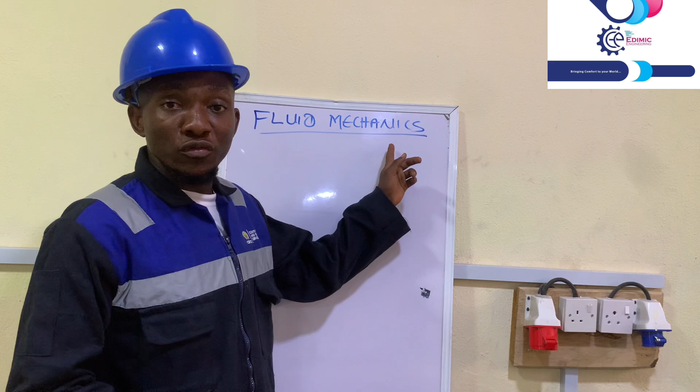So on today's class, we'll be talking about fluid mechanics. This happens to be a very important aspect of mechanical engineering. Fluid mechanics is very important, and if you must be a successful mechanical engineer, you must consider fluid mechanics. So on today's class, we'll be talking and teaching about fluid mechanics.

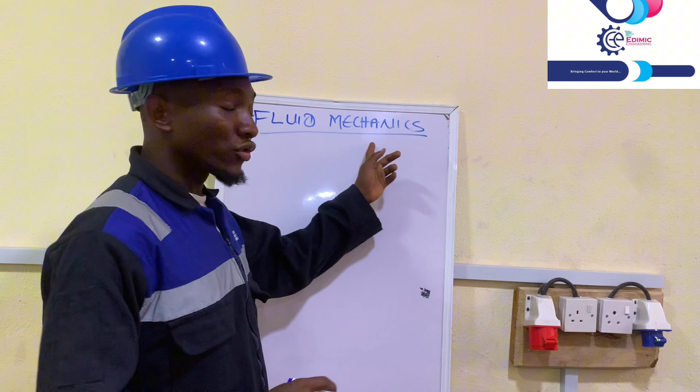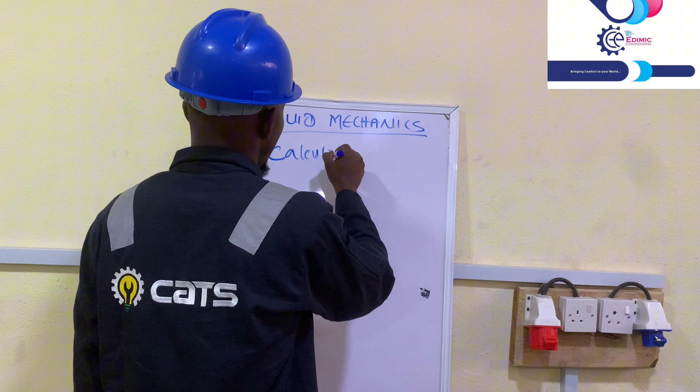But before we go into it deeply, I want to tell you the prerequisites, what is very important if you must scale through this very topic and course. There are things you must pay attention to, number one is calculus, which has to do with integrations and derivatives. So if you must be a successful fluid mechanics engineer, you must know your calculus very well. That is a prerequisite, something very important if you must deliver this course, fluid mechanics.

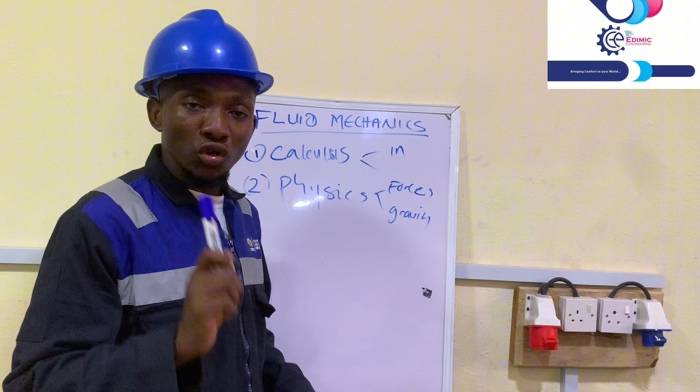Now the second one is your knowledge of physics, which has to do with forces and gravity. So to be very competent and profound in the course fluid mechanics, you must ensure you know your calculus very well and your physics very well, which is forces and gravity. So I believe that is very okay for us.

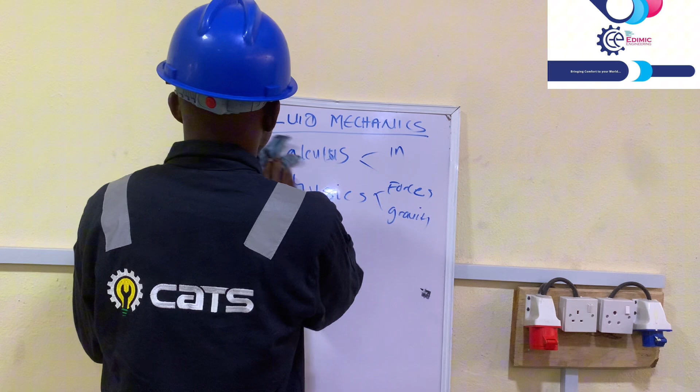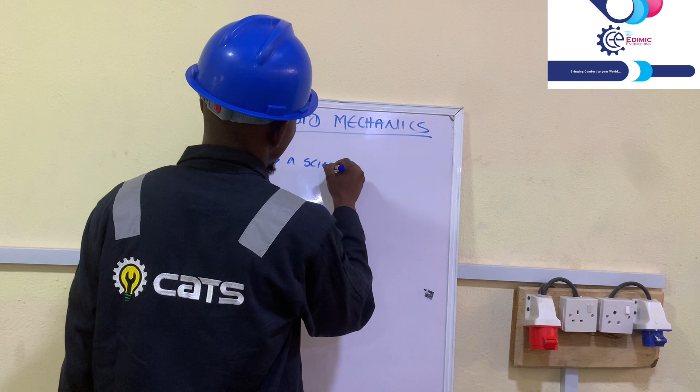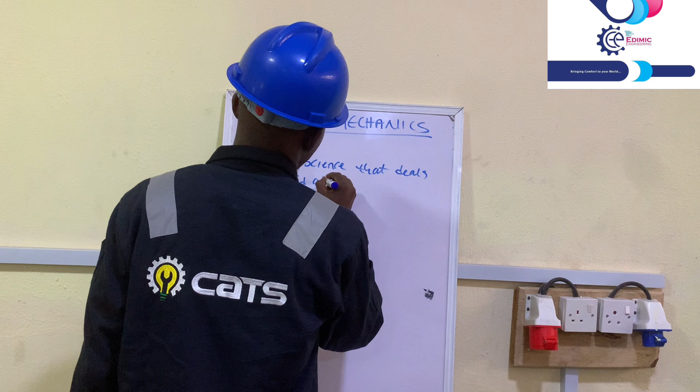So we'll go deeply into our main course for today, which is fluid mechanics. So now, what is fluid mechanics, as people may be asking? Fluid mechanics is a science that deals with fluid at rest and at motion.

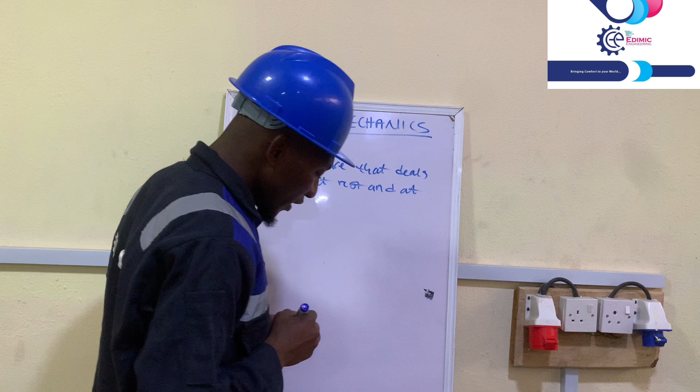So it is very, very simple. When we talk of fluid mechanics, we are talking of a science that deals with fluid at rest and also when the fluid is in motion.

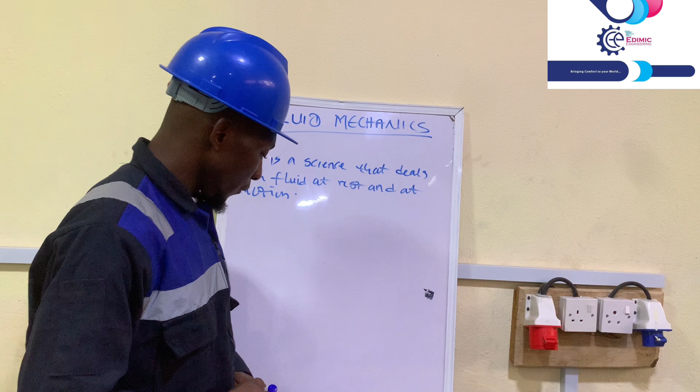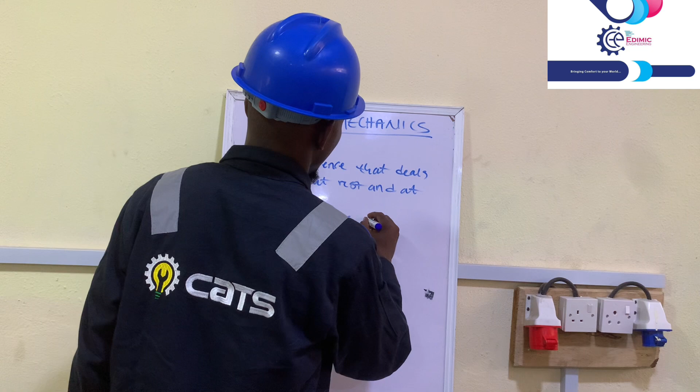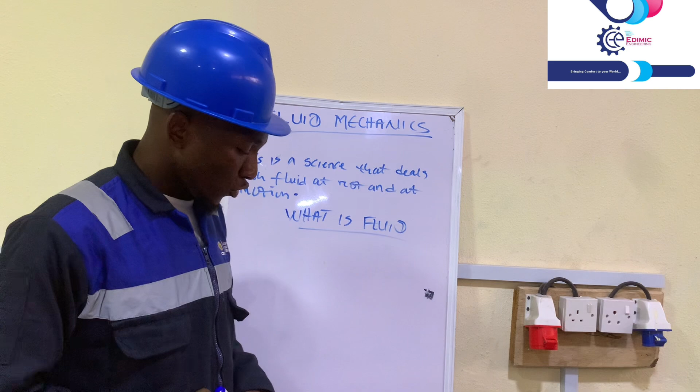So now what is fluid? Fluid is defined simply, let me make it very simple: anything that flows is fluid. So don't take it to be very hard for you, it is very simple. Anything that flows is a fluid. So your water flows, that is a liquid. Your gas flows, that is a fluid. Your oil flows, that is a fluid.

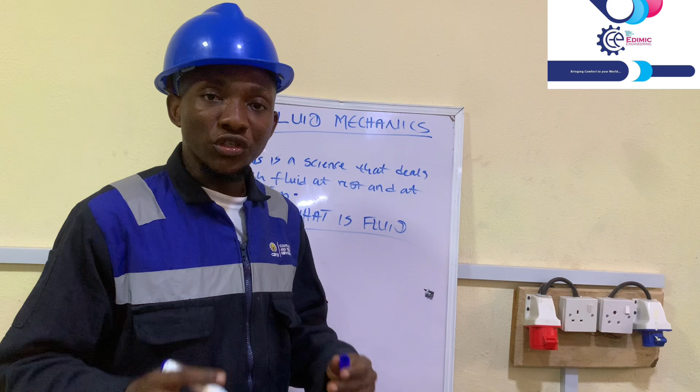So now, in the pure sense of engineering, fluid is any substance that deforms continuously under the application of a shear force. Fluid is a substance that deforms continuously under the application of a shear force.

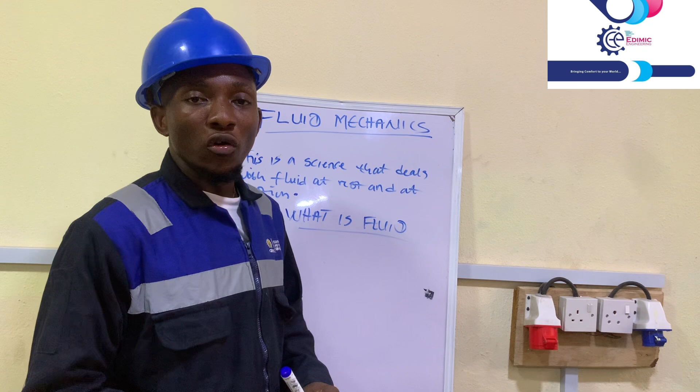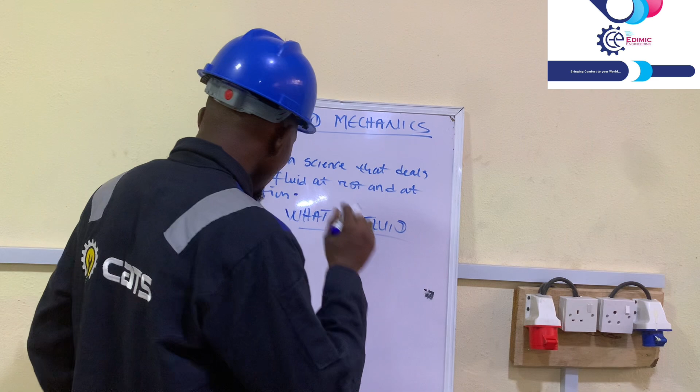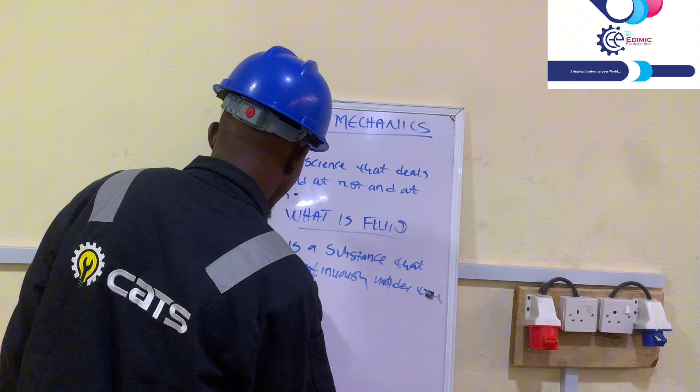Now, irrespective of the size of the force, just a little force will deform a liquid. So fluid is a substance that deforms continuously under the application of a shear force, a shear stress, no matter how small the stress is.

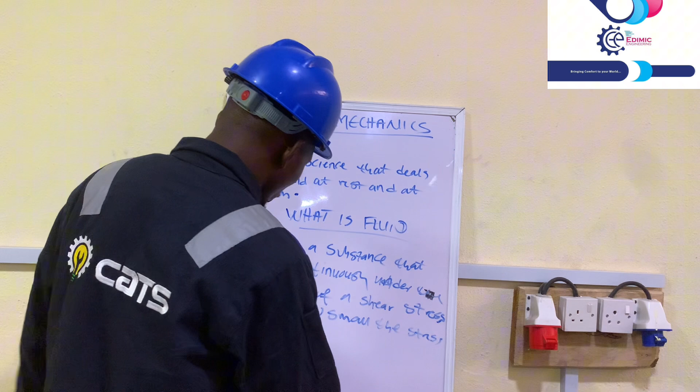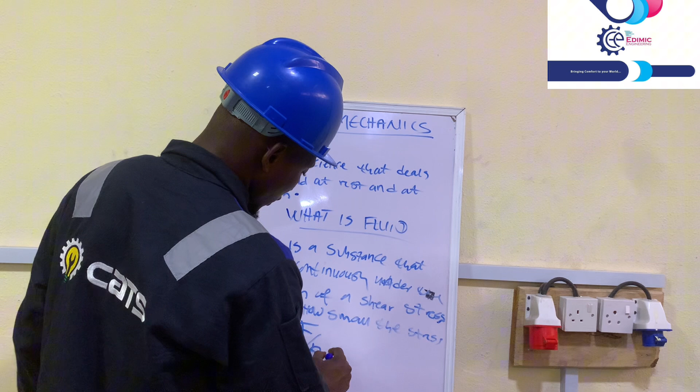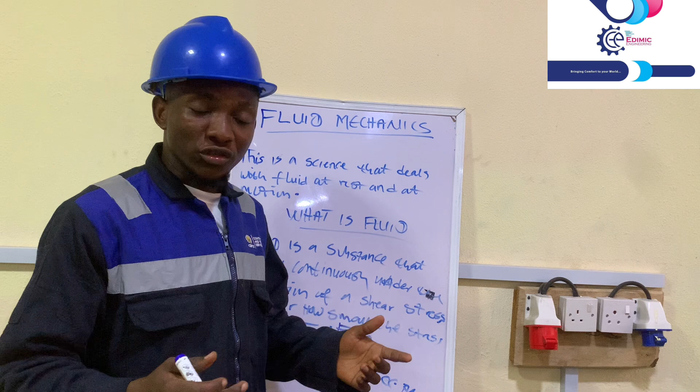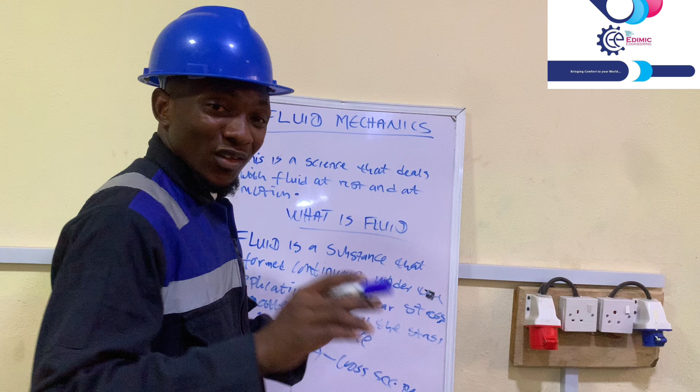So the stress we're talking about is very simple. Now you know stress to be force all over cross sectional area. It's very simple: force all over cross sectional area, where F is your force and A is your cross sectional area. So fluid is simply defined as a substance that deforms continuously when a shear stress is applied, no matter how small the stress is. That is what fluid is, which is very simple for you to understand.

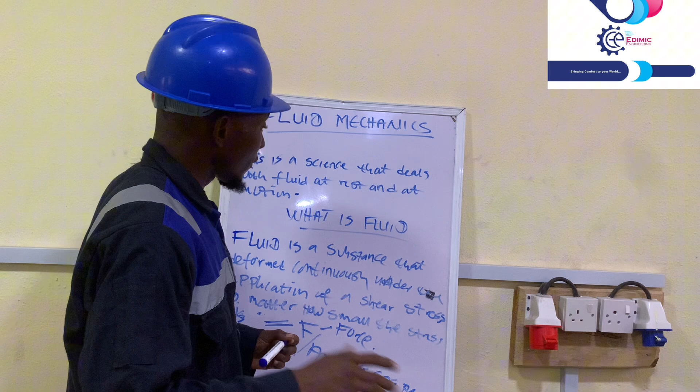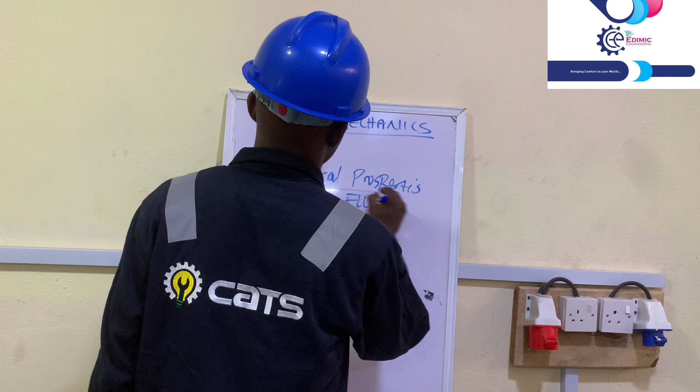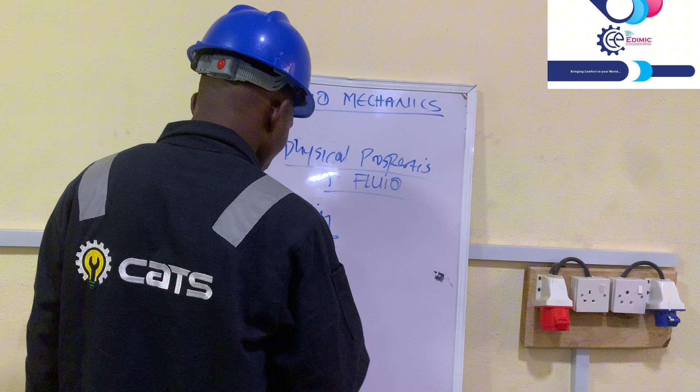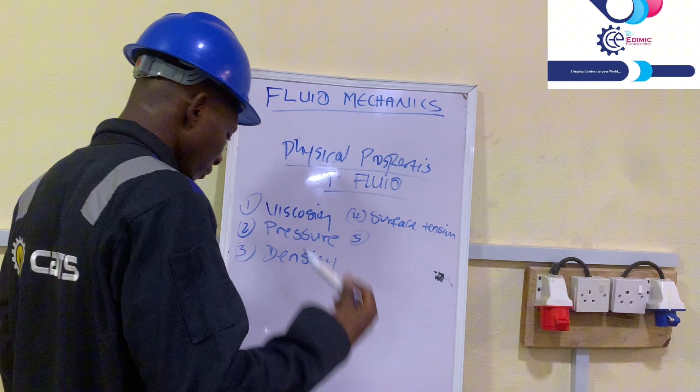So we'll go into the physical properties. Now, what are the physical properties of a fluid? Number one is viscosity, two is pressure. These are things you must put into consideration as the physical properties of a fluid. Number 3 is density, number 4 is surface tension, number 5 is specific weight. Every fluid has weight, so specific weight is considered as one of the physical properties of a fluid. Then number 6 is compressibility.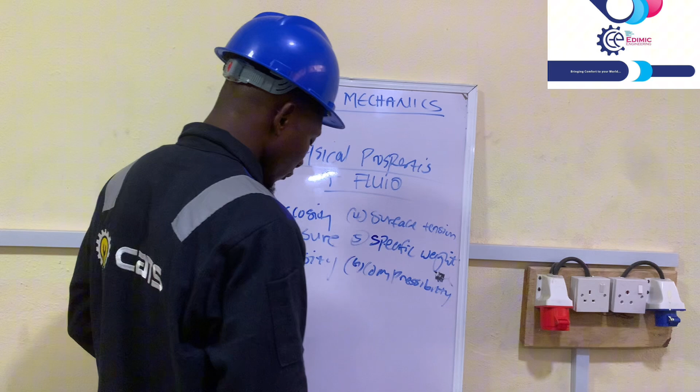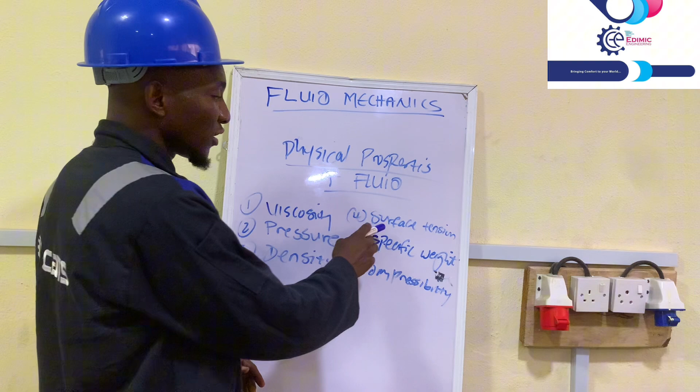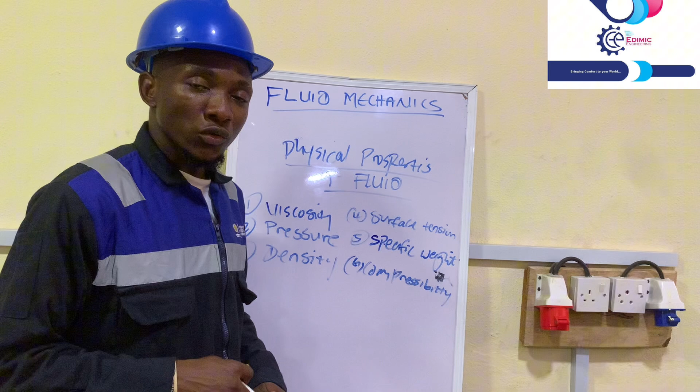So in our subsequent class, I'm going to ensure I bring this down to our understanding: viscosity, pressure, density, surface tension, specific weight, compressibility. So in today's class, I will not take us too far, I just want to enlighten us on the prerequisites for this very course, fluid mechanics.